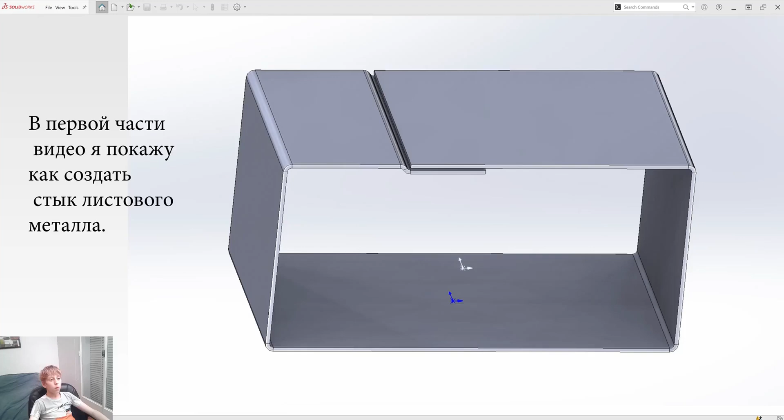Hello dear friends, in this video I will explain several sheet metal functions in SolidWorks.

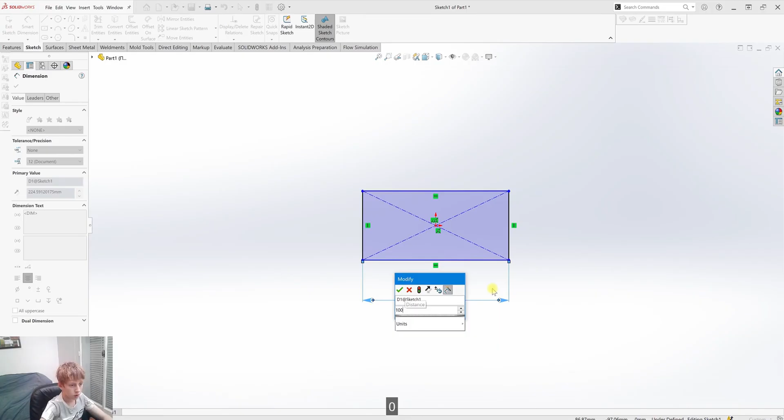Click on part, select the front plane and draw a small rectangle here. Let's make it 100 millimeters long and 50 millimeters wide.

Now we select sheet metal and use the base flange command to extrude it by 1 millimeter.

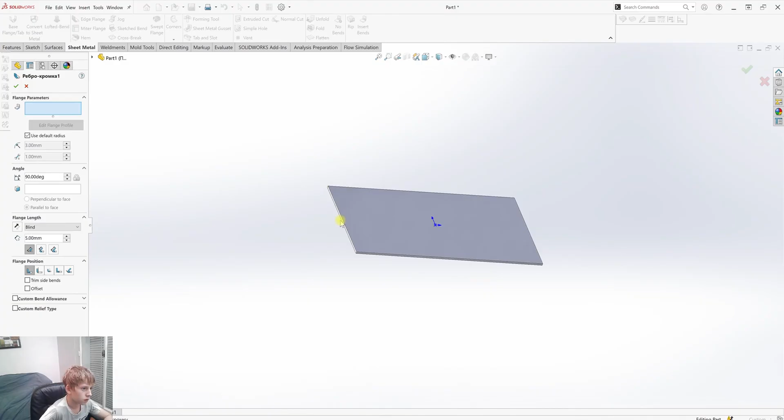After that, we create an edge flange. Select the edge. Excellent. Do the same on the other side, 50 millimeters. Set the type so that the material is inside and the radius to 1 millimeter.

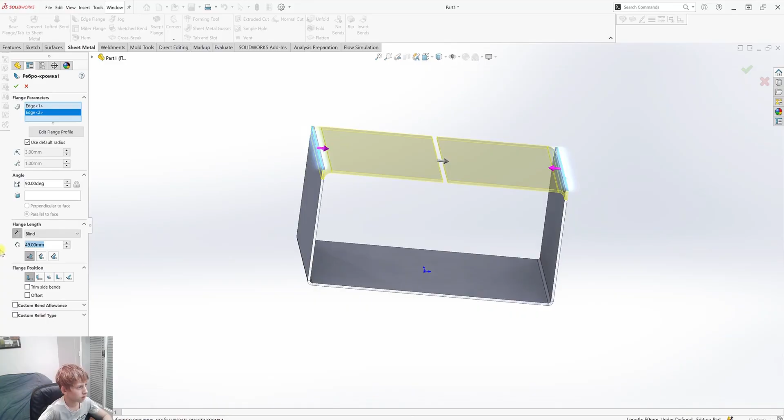After that, repeat the same command for 49 millimeters, that's right, also with a radius of 1 millimeter.

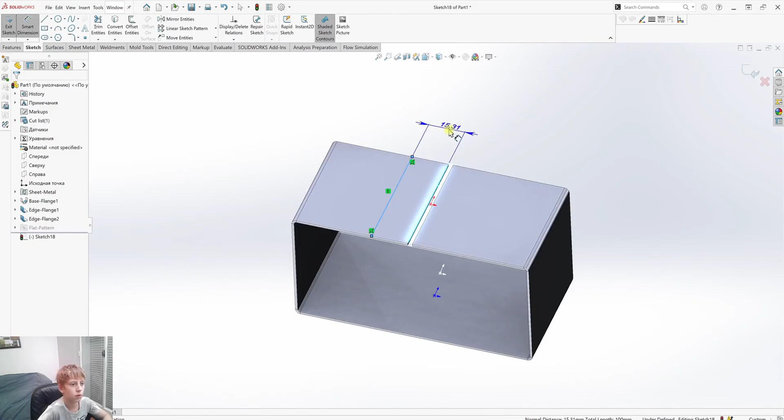Next, we draw a sketch on this surface and draw a line here, and we set the distance to 20 millimeters. I want to demonstrate how one plate will overlap the other for convenient welding.

Next, exit the sketch. Select the jog command, remove it from this side and select the plane. If we choose this one, nothing will work out. Select from this side. You can see that a point has appeared indicating from which side the bend will occur.

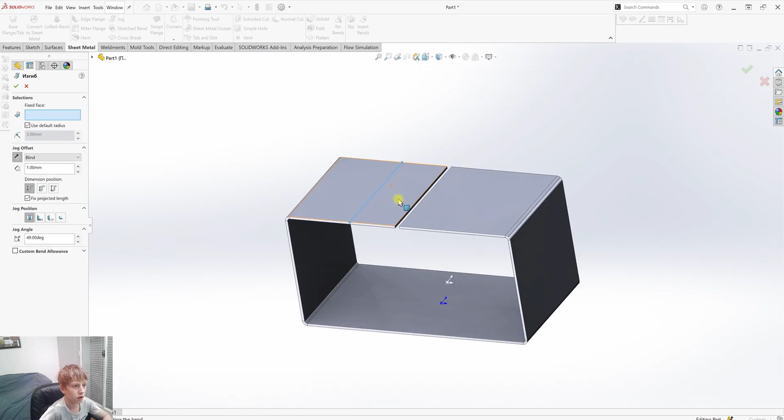This way it will make the bend from this side, and this way it makes it from this side. We need it to make the bend from this side. Here, set it to 1 millimeter.

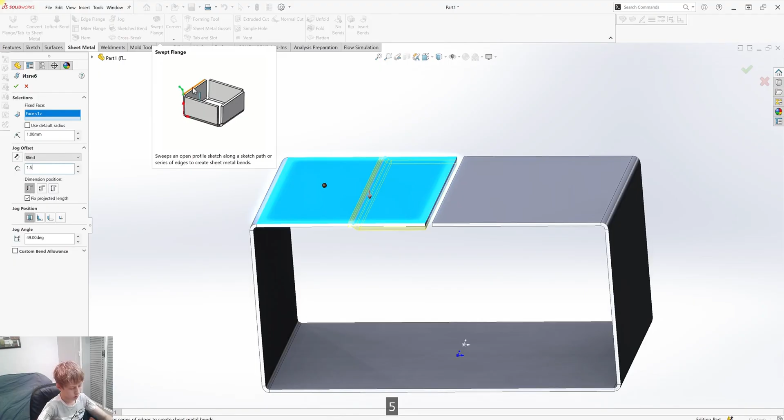A direction appears. Set it to 1.5 millimeters, approximately 1.5 millimeters in length, measured precisely at an angle of 49 degrees. Yes, the type is correct.

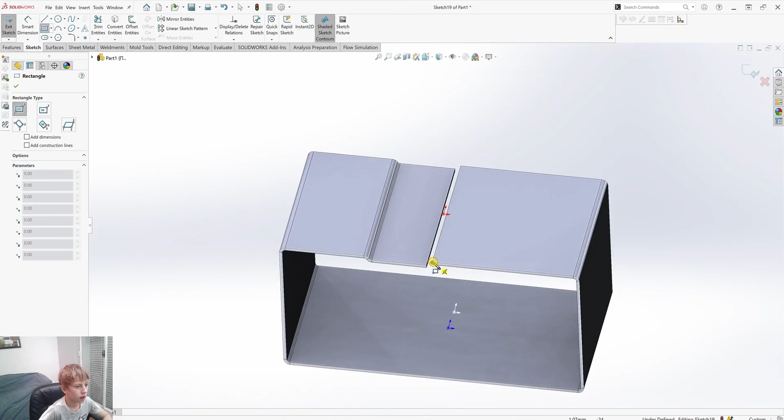Okay, now we've made this little bend. Let's make a sketch here, and with a small square, we draw up to this point.

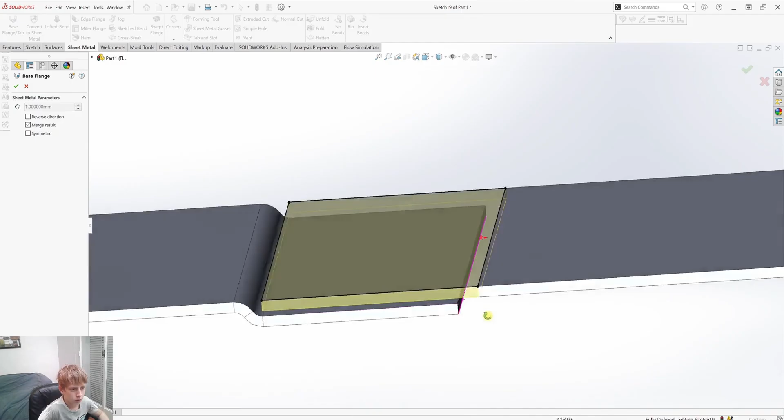Now, approximately, select one point and another point and make them coincident. After that, go to sheet metal again and select the base flange command, and check the merge result box.

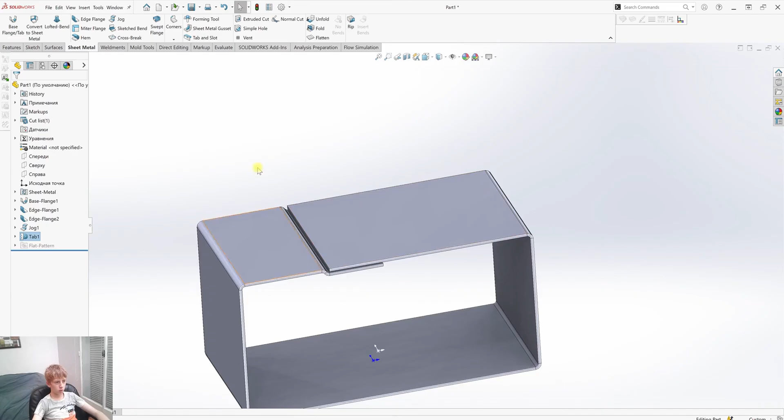With this kind of complex joint, you can easily weld the two ends of the plate together. If we hadn't made this joint, it would be very difficult to weld because the metal is so thin and it would burn through. This is the first feature I wanted to demonstrate.

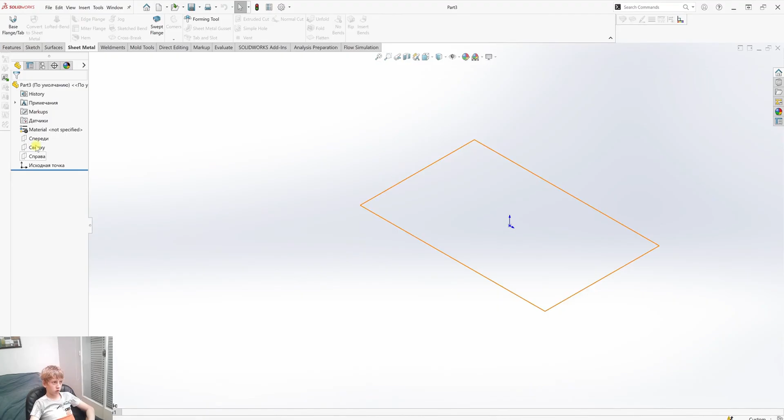Now I'll show you the function for creating a fan grill in SolidWorks. Sheet metal, sketch, flat from the front.

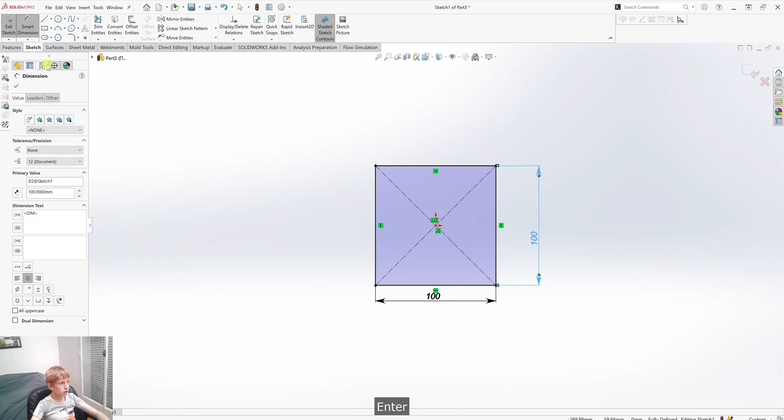And here, first we draw a square, exactly 100 by 100, measuring precisely 100. Great. Now go to sheet metal and extrude it by 1 millimeter.

Create a sketch on this plane. Press Ctrl 8 to set our view perpendicular to the screen and draw a circle from the center. Another one, also from the center.

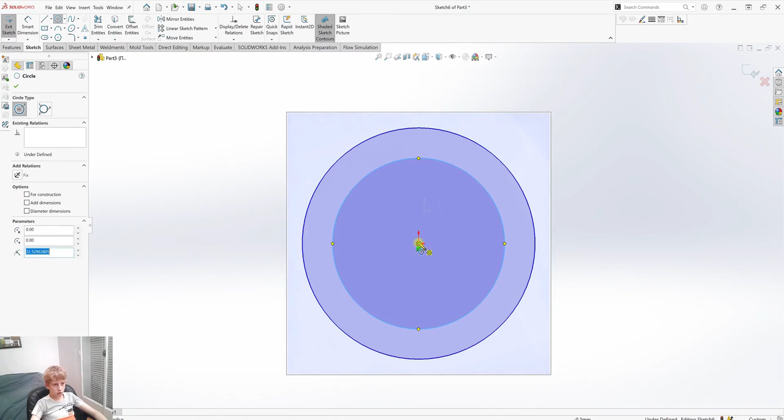And then one more, and the last one. We create this circle with a diameter of 80 millimeters.

Here, we set the distance between the circles to 10 millimeters, and so between each gap, between the circles.

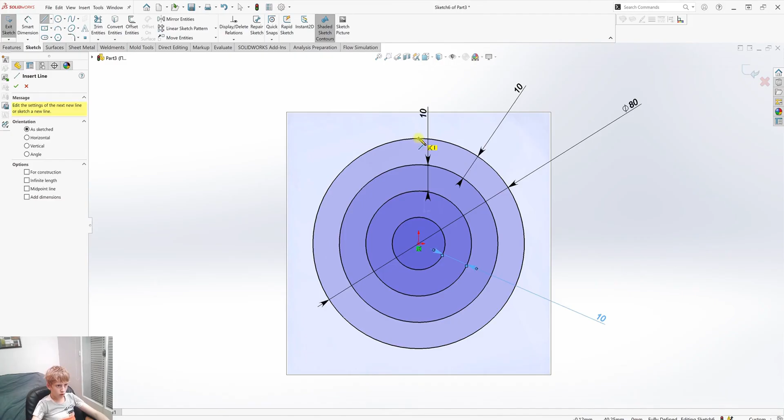Now take a line and draw it from one top point of the circle to the other. Simply double click to disable the line, ending the line. There we've created the lines.

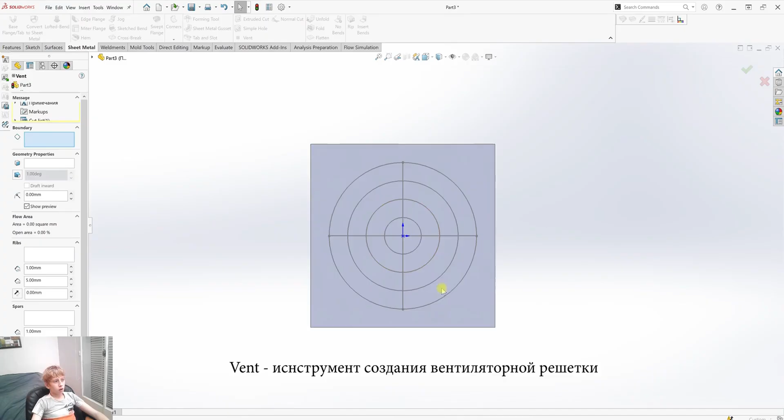At this point in our workflow, the next step involves navigating to the sheet metal section within the software interface. Sheet metal in this context refers to a specialized module or workspace designed specifically for creating, editing, and managing parts that are intended to be manufactured from sheet metal materials.

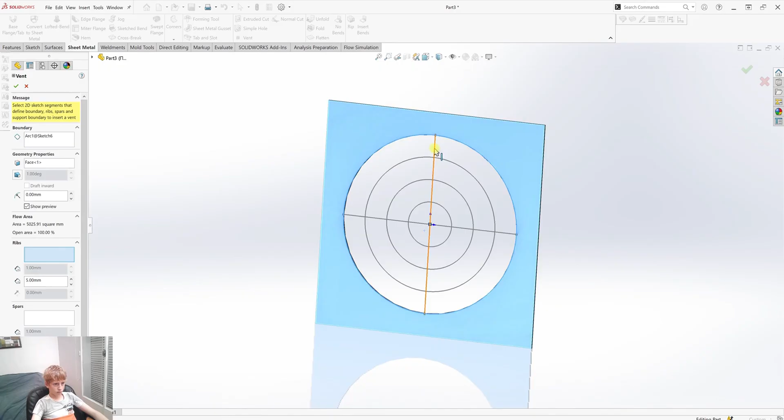To access this area, look for the tab or menu labeled Sheet Metal in the main toolbar or navigation pane of the application. Once you have located the Sheet Metal section, click on it to enter the dedicated workspace. Here you will find a variety of functions and commands that are essential for working with sheet metal components.

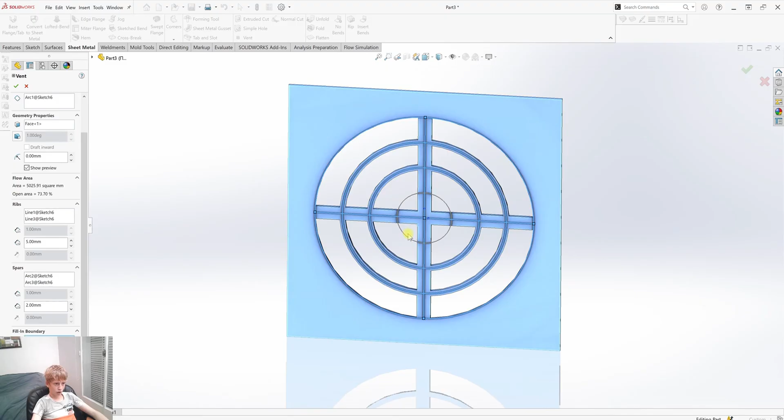The next step is to select a specific function you need to use. This could include operations such as creating a base flange, adding bends, inserting cutouts, or applying forming tools. Each function is designed to perform a particular task that is commonly required in sheet metal fabrication.

For example, the base flange function allows you to define the initial shape and thickness of your sheet metal part, while the bend function enables you to add bends at precise angles and locations.

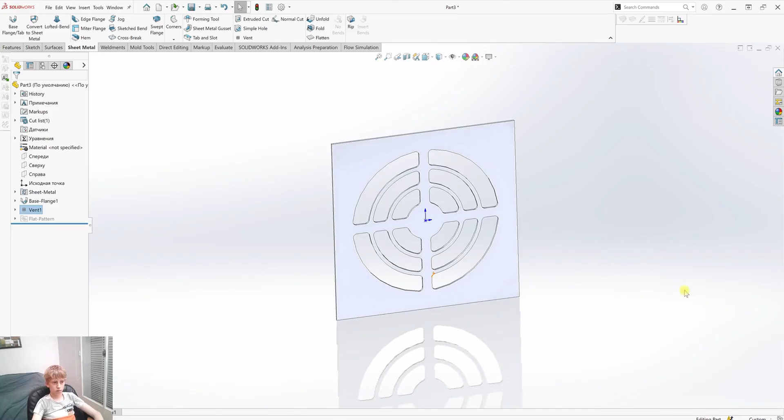To select a function, review the available options in the sheet metal toolbar or command panel. Hover over each icon or menu item to see a brief description of its purpose. Once you have identified the function that matches your design intent, click on it to activate the tool.

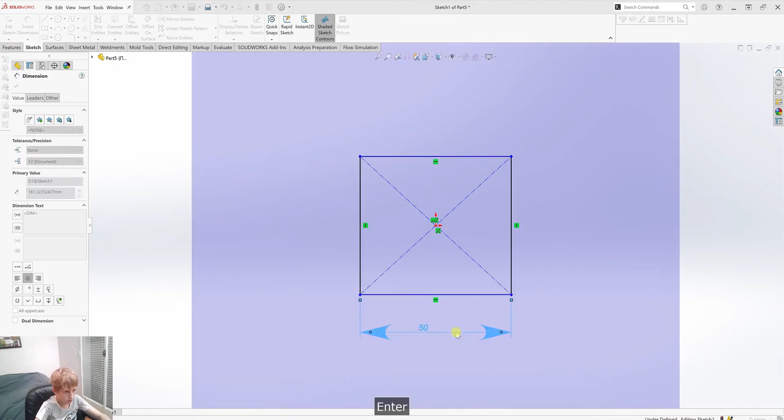The software may then prompt you to specify parameters such as dimensions, angles, or material properties, depending on the function you have chosen. Carefully enter the required information, making sure to follow any best practices or guidelines provided by the software documentation or your organization's standards.

By following these steps, you ensure that your sheet metal part is created accurately and efficiently, taking full advantage of the specialized tools available in the sheet metal module. This detailed approach not only streamlines the design process but also helps to prevent errors and ensures that the final part can be manufactured according to the desired specifications.

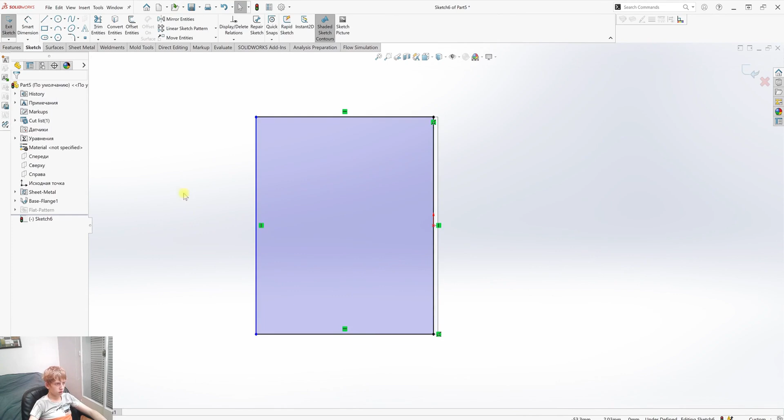In summary, the process involves navigating to the sheet metal section of the software, familiarizing yourself with the available functions, and selecting the appropriate tool to carry out the next step in your design. This methodical approach is essential for achieving high-quality results in sheet metal design and fabrication.

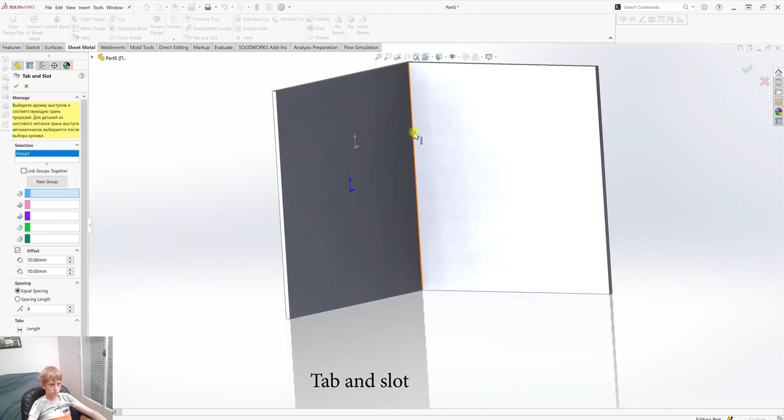Select this edge. Two points have appeared. They show us where the count of all our lower model parameters starts and ends. And now select this face.

Set 3 millimeters here and 3 millimeters here as well. 5 instances. This is the number of instances we have.

There is also spacing. This is the distance between our teeth. If we adjust it, the number of our teeth will either increase or decrease.

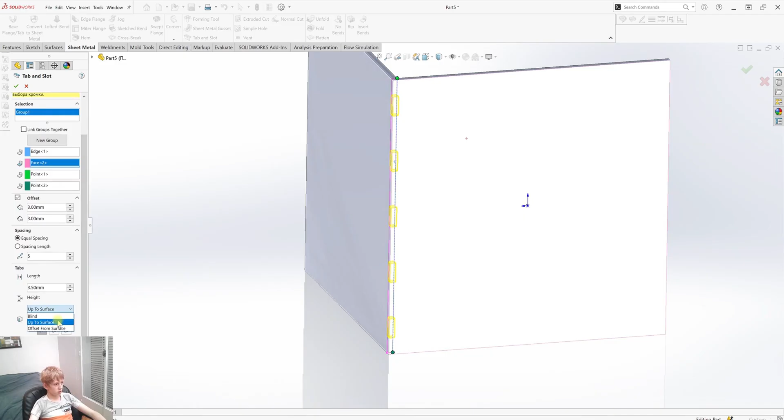I select equal spacing, where you can enter the number of instances as a value. You can also extrude our teeth and, for example, connect two plates.

And if you want some parts to protrude, you can simply specify the length and they will extend beyond the edge of our second plate.

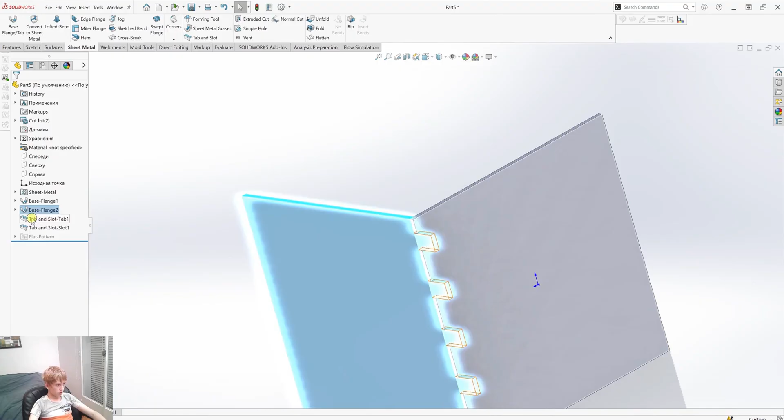We edit our tab and slot, and I will set Up To Surface for the surface.

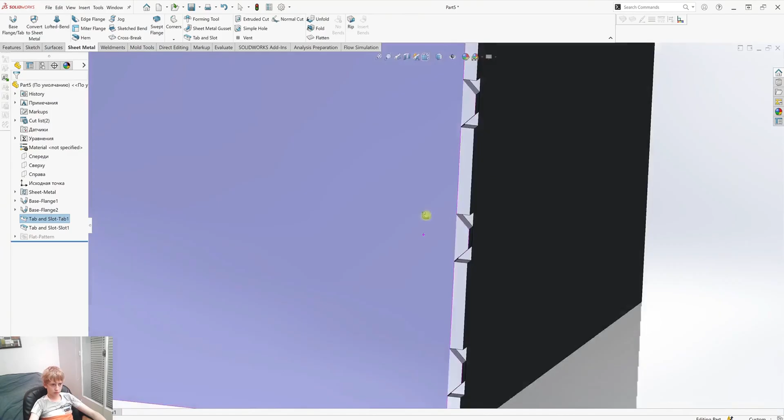Next, here you can specify the types of our cutouts. I will select this type and it will fit into the plate like this, but others of course will fit differently.

Here you can also specify new groups. For example, if you have a corner here as well, right here, you can specify it here just like in the previous window and then set different parameters for it.